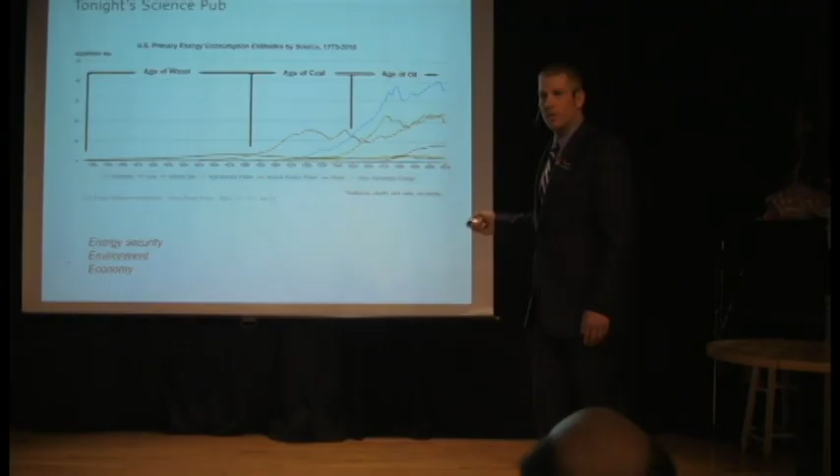Okay, so a little background. I was doing a presentation at the University of Fairbanks, Alaska, and I came across this slide, and I never really thought about it, but we had the age of wood in this country. And given our choice, we chose to go back to the age of wood for energy. And then we had the age of coal here. Coal is this brown right here. Coal is tailing off. And then we had the age of oil here starting about 1950. And we see the downturn in oil. And we actually see an uptick in the green here for natural gas. And then we have our renewables and nuclear over here, rounding out the balance.

When I look at the energy situation in this country, I really think about these kind of 3 E's. It's a good way to think about it. You have to address all of these. That's energy security, the environment, and the economics of it. Frankly, you have to nail all 3 of these if you're going to be successful. So, we'll talk a little bit more about the energy situation here in the United States. Talk a little more about natural gas. So, we have natural gas, you see the pipeline, but there's other types of natural gas, renewable types of natural gas we're going to be able to make better use of. And why are we hearing about natural gas? So we'll talk a little bit about that. And that pops for emphasis.

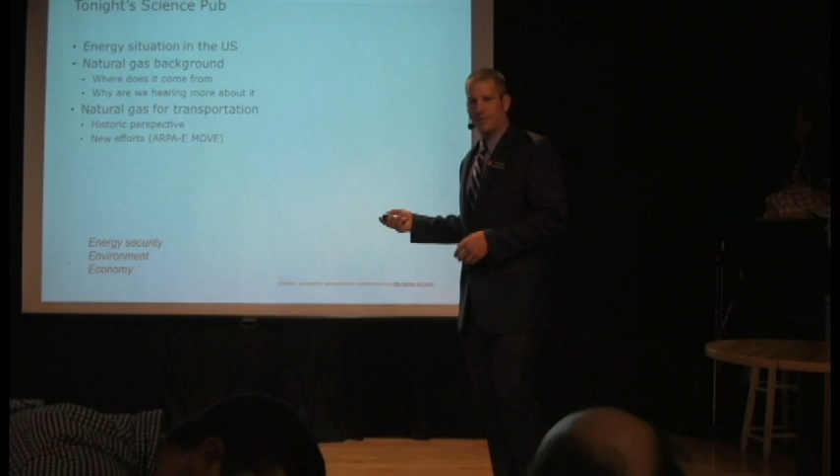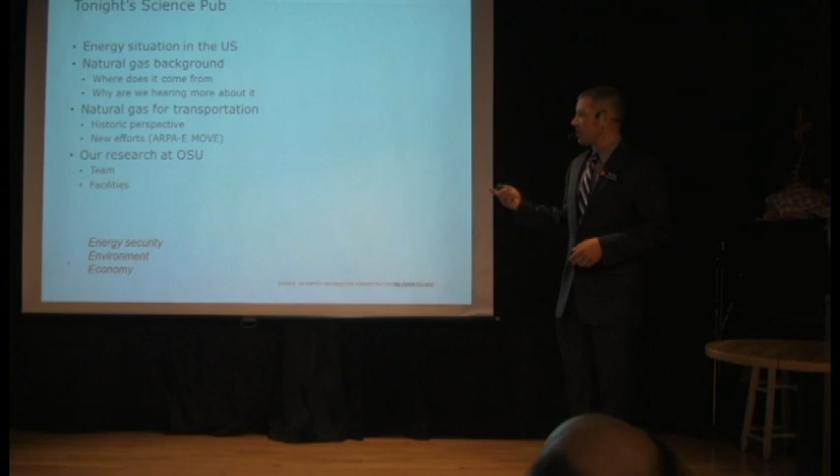So natural gas for transportation, I want to give you a little bit of a historical perspective there. And then new efforts, this is the research that we're doing in Bend. And then talk a little bit about my team and facilities, and then recap.

Okay, so natural gas, you can see here, proven reserves are going exponential, and we'll talk a little more about that. That's thanks to not necessarily so much hydraulic fracturing as it is directional drilling. So hydraulic fracturing is actually on everybody's mind, but what's really enabled this has been directional drilling. Our petroleum reserves in this country have been declining.

Because of this, we have this decoupling of the price of natural gas from petroleum, where just in the last 5 years, basically, petroleum has increased in cost quite a bit per barrel, while natural gas has actually dipped. Natural gas costs about $1 a gallon of gas equivalent, $1 to $2 a gallon gas equivalent if you were able to fill your car with natural gas. So there's an opportunity there.

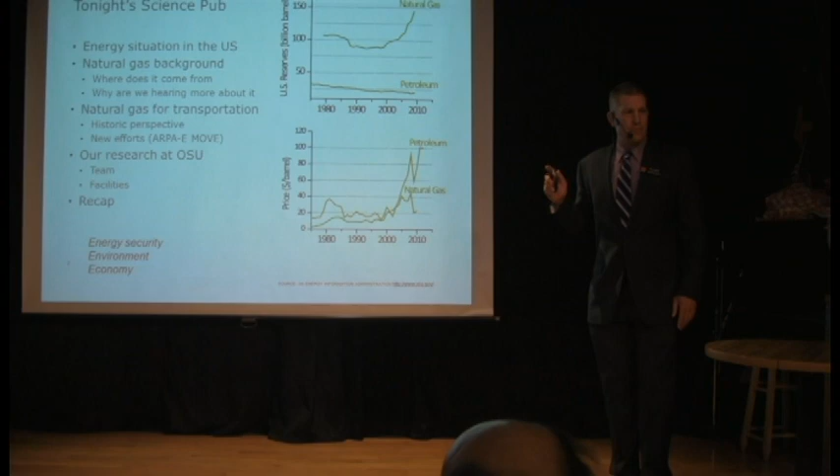And one other thing that really puts this in perspective for me in my career is back here in about 2002, 2003, when there was actually parity with natural gas and petroleum, or natural gas being slightly more expensive. I was out in the fields of Wyoming with the product my company had at the time called the natural gas blower that was sucking depleted wells for their natural gas, even at the price of natural gas being greater than petroleum, because it was financially feasible. So we've gone from sucking natural gas out of depleted wells with natural gas being unfavorable to having plenty of natural gas.

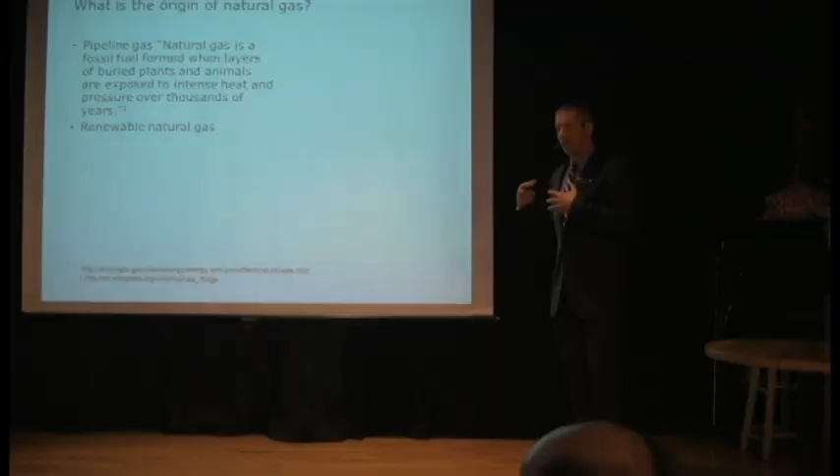Okay, so where do we get the natural gas in this country? What I like to call pipeline natural gas is from fossil origins, layered plants and animals and so on over thousands of years. Renewable natural gas is something that's fun to think about. So as a person who's on the engine side of things or the power generation side of things, I try not to concern myself too much about where the molecules come from, because basically they could be coming from a pipeline, they could be coming from renewable sources. For example, biogas, water treatment plants, landfill, livestock.

And so when I came to Oregon, I thought, okay, what does Oregon have as far as natural gas? It turns out it doesn't produce any, so I had to look to see where I might find some natural gas. The Japanese are exploiting this. So I think there's some research here in Corvallis for methane hydrates, and I'm interested in methane hydrates. But the Japanese don't really have a choice, and they are leading the technology as far as tapping into methane hydrates.

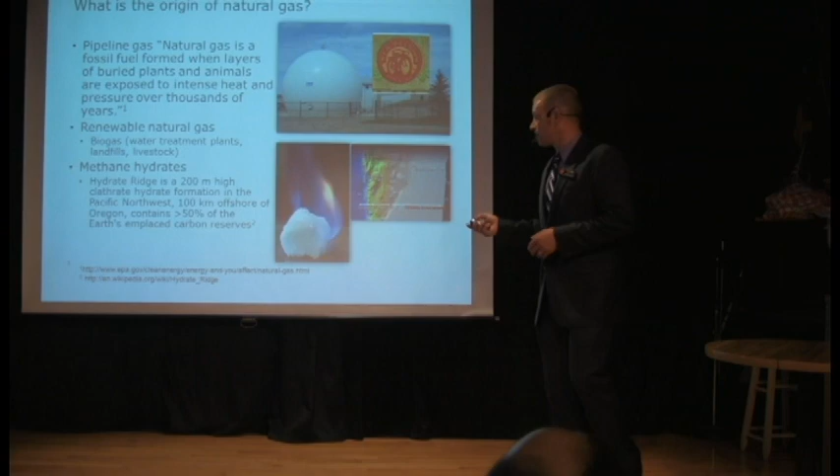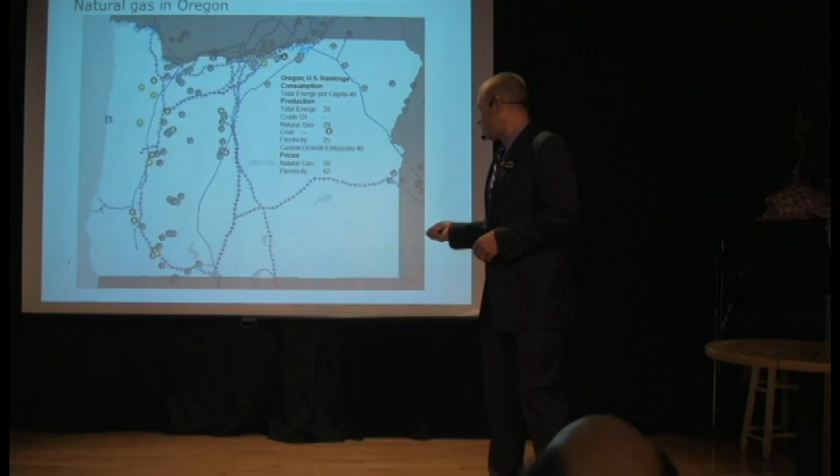What I also like to note on this map is this line right here, which is the Ruby pipeline. A friend of mine helped build that. It's a 42-inch natural gas pipeline. And you can see how it comes down through Nevada, goes around California, hugs the border of Oregon and California until it gets here, so that El Paso, which is now Kinder Morgan, can pass it off to Williams Gas Pipeline. It becomes their head when it goes to California. So there's a lot going on there with the regulatory and financial situation.

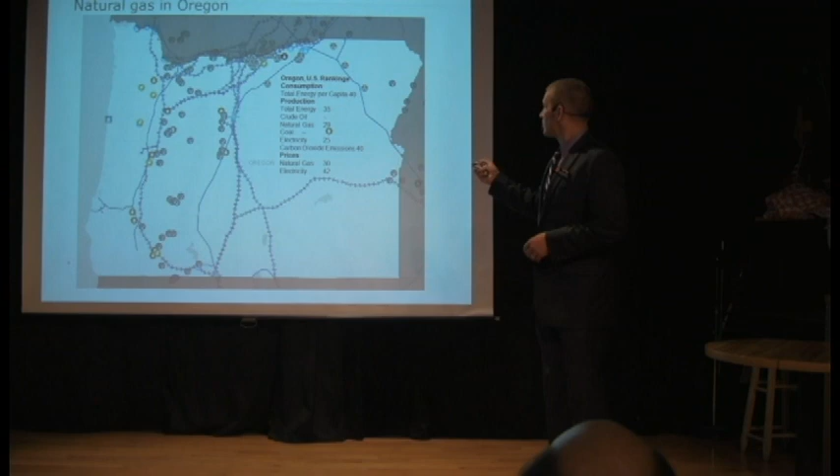So this is Oregon. I want to contrast that. Oh, and by the way, I just toured the Arlington landfill, which is up here by my pointer.

Up here between Biggs Junction and Hermiston, where they do a lot of landfill gas power generation and they do gasification. They get all the trash from Seattle. They take it, they let it decompose, they do power generation with it, and then they sell electricity back to Seattle for their renewable credits. And so it's a pretty ingenious situation and a great tour to get a chance to go on.

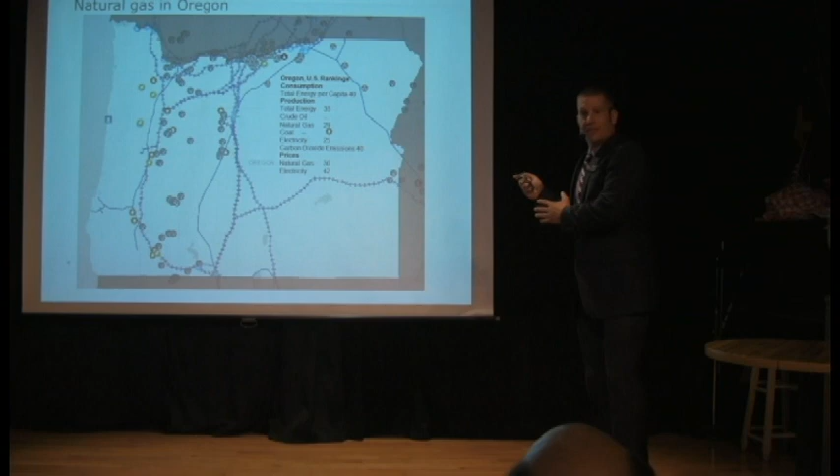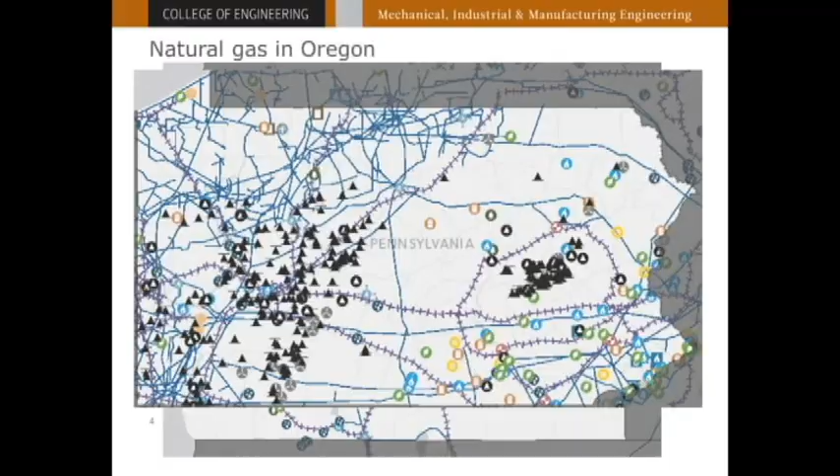We're very fortunate here to have a lot of hydro, but to look at the country, there's a lot going on. And this is some of the Marcellus Shale, which we'll talk a little bit about. But the point here is that other parts of the country have a lot going on as far as exploiting natural resources.

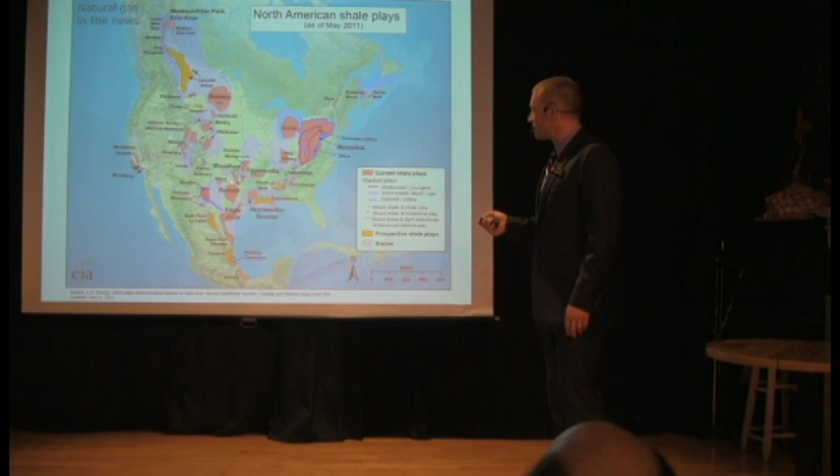So in the past, when I was working on the pipeline, we were trying to get gas from the Gulf of Mexico up here to the population centers of the Northeast. You can see what happens when you find this giant Marcellus shale right there next to the population center. So they were building new pipelines to take the gas from the Gulf or the Rockies to get it over here to the Northeast where prices were favorable.

Well, with the Marcellus shale, it turns out, with the most recent information I have, some of those pipelines are looking at reversing because there's so much gas here in the Marcellus shale that these guys up here in the Northeast no longer need it, and they might try to send it back somewhere in the middle of the country.

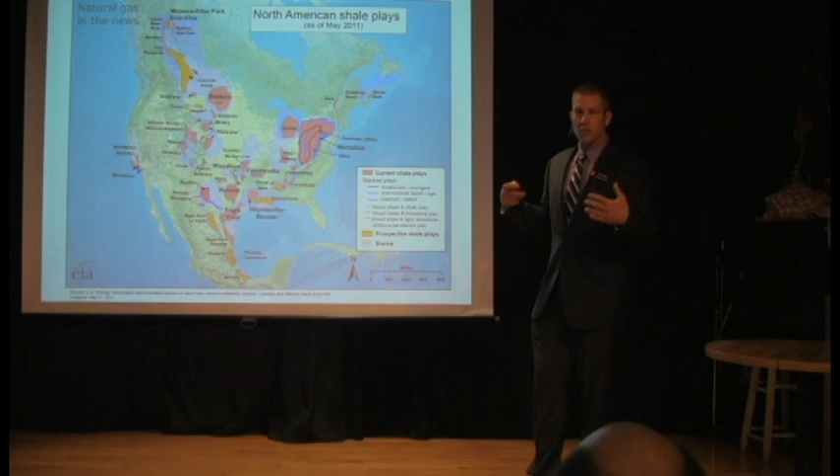So the Barnett, Eagle Ford, and some of the Colorado, Wyoming shale plays have really been exploited because they already had the ability there, they were already drilling there. So these guys went first. And then the Marcellus shale is strategically positioned.

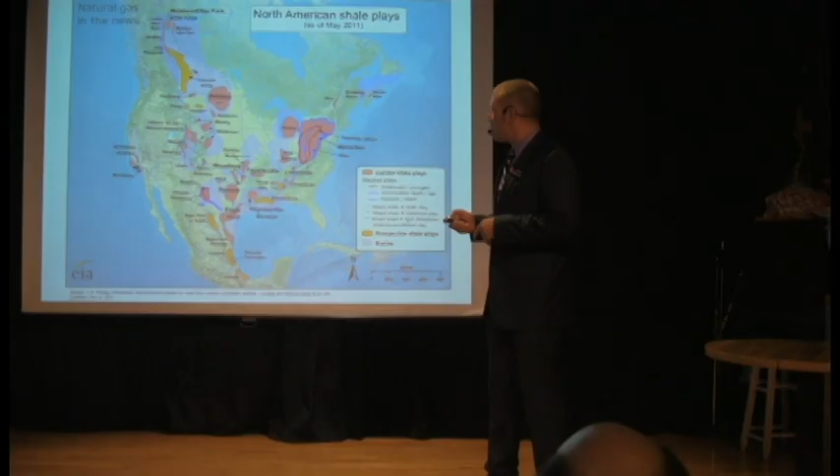Some of the news stories you're hearing is the Bakken up here in North Dakota. It really is the Wild West. I just recently saw a talk where people at McDonald's make $20+ an hour because that's the only way they can get people to work at McDonald's. I have a little bit of a Clint Eastwood good, bad, and ugly theme in some of my other slides. So, to tie that in, this is the Wild West right here. So that's an interesting one to follow.

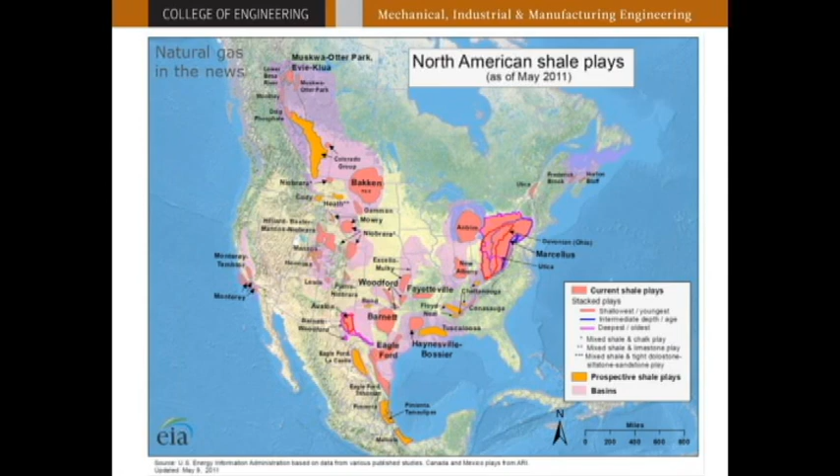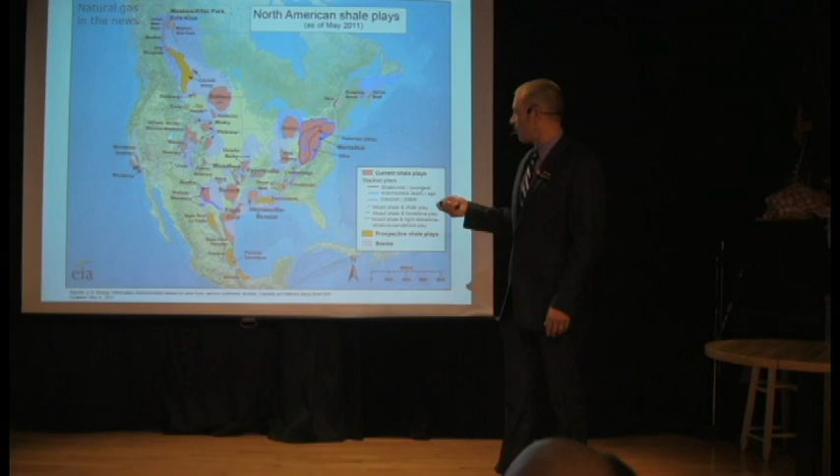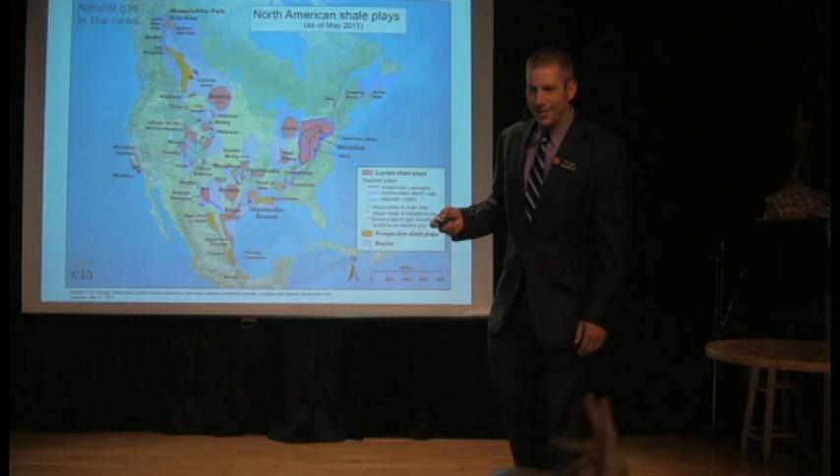So that's why you hear a lot about natural gas, that and the method for getting it, the hydraulic fracturing and directional drilling. Chris, what's the difference between a play and a basin? I don't know, I'm not an exploration person. Yeah, that's a jargon I use.

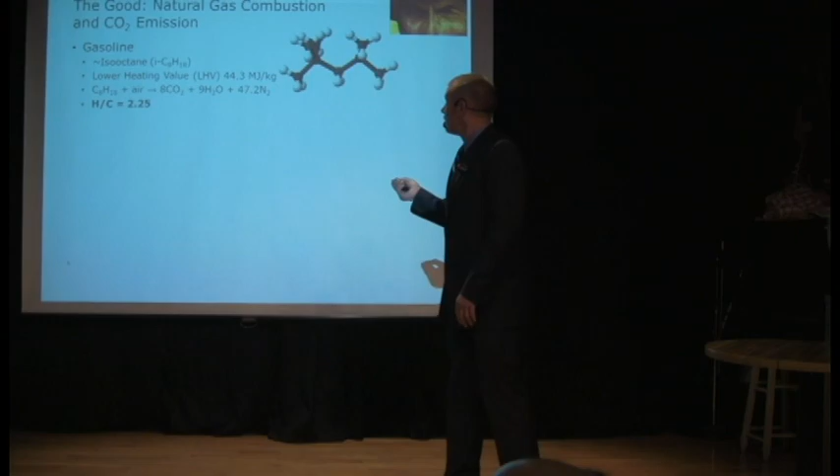Okay, so the good, bad, and the ugly for this natural gas situation. So what I consider to be the good is if you have gasoline, which mechanical engineers model as 2,2,4-trimethylpentane, which is the closest single molecule we can get to behave like gasoline. You have a low heating value of 44.3 megajoules per kilogram. This is the stoichiometric equation, but what I want you to look at is you have 9 waters to every 8 CO2 molecules per molecule of fuel. And the hydrogen to carbon ratio is 2.25.

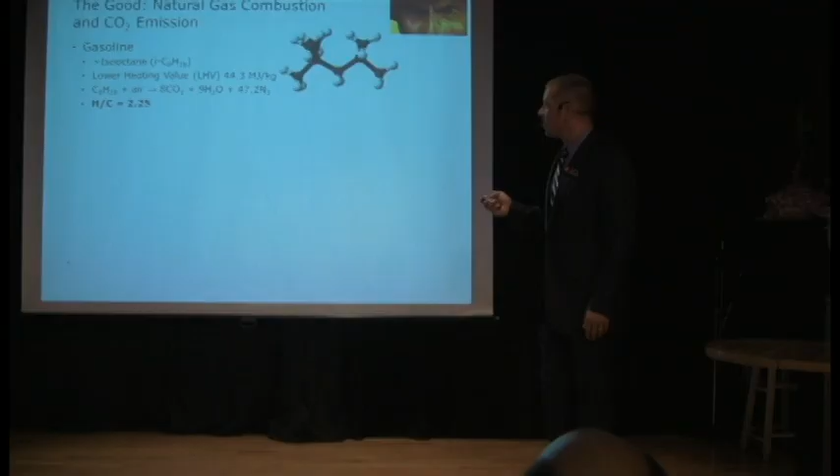Okay, so natural gas, which is modeled as methane generally, because it's mostly methane, 85 to 95% methane, has 50 megajoules per kilogram. So that heating value on a mass basis, which some of you got right in the trivia, is higher for methane than it is for natural gas. It's higher for natural gas than it is for gasoline.

But the stoichiometric equation here has 2 waters for every 1 CO2, and it has a hydrogen to carbon ratio of 4. So basically you have a fuel here that has more energy per unit mass, that produces less CO2, significantly less CO2. So one would think, okay, well this is great. If you have to make a transition from a purely liquid hydrocarbon basis, and you're stepping towards a lower greenhouse gas situation, natural gas is not a bad intermediate step.

So this became apparent to me when I saw Robert Kennedy Jr. talking at the Colorado Oil and Gas Show back in 2010. So he's an environmental lawyer. He came to talk to the other side, which was the oil and gas people, to say, hey, listen, we're doing all these renewable fuels installations, but the wind doesn't always blow and the sun doesn't always shine. But we want to have base load type technology.

And so they're going to use natural gas. Natural gas is a natural fit to smooth out the transients for the wind farms and the solar installations. So to me, this showed that there was a good way for everybody to work together with natural gas.

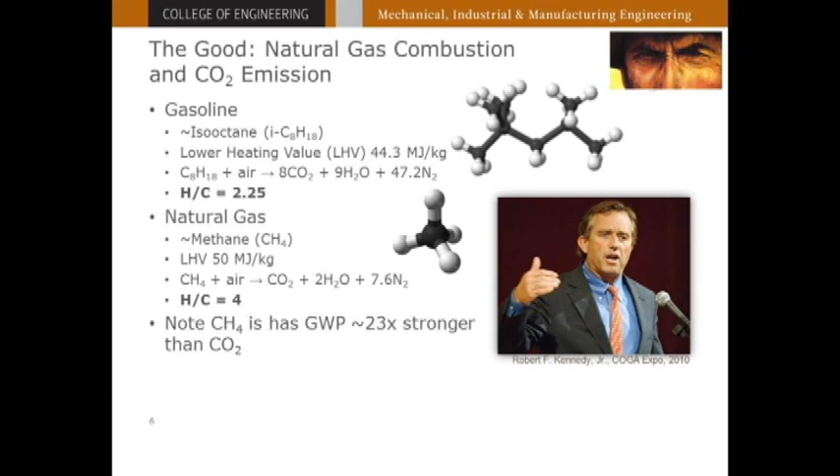One of the downsides is that methane has a global warming potential of 23 times or higher than CO2. And that's all dependent upon the lifetime of the molecules, over what time you're going to look at, and the spectral absorption for the different molecules. But anyhow, if you let that methane leak out, it's actually not helping us as much as we would hope.

Okay, the bad. Hydraulic fracturing and horizontal drilling. So this is the drilling situation for natural gas. Before we did conventional drilling, which was we drilled down a little bit, it was right there, a big pocket, we got a bunch of it, it was easy, and everybody was happy. So now we're going down much, much deeper, and we're doing the directional drilling. So we're getting down here in these tight sands and gas shales, and we're fracturing these formations.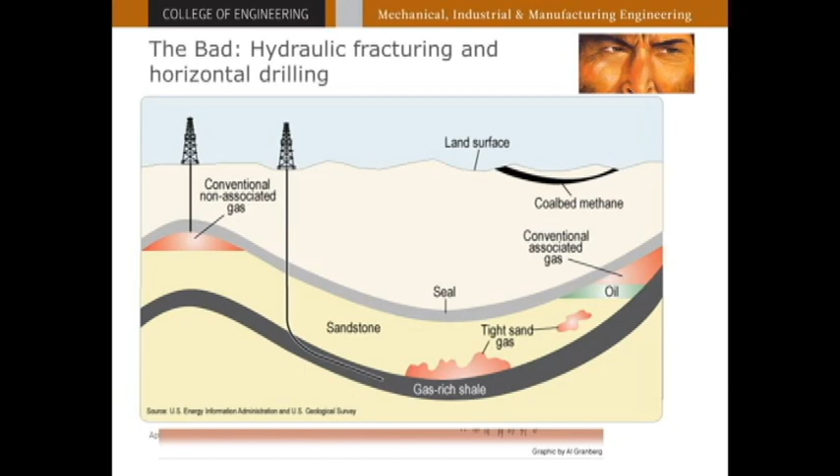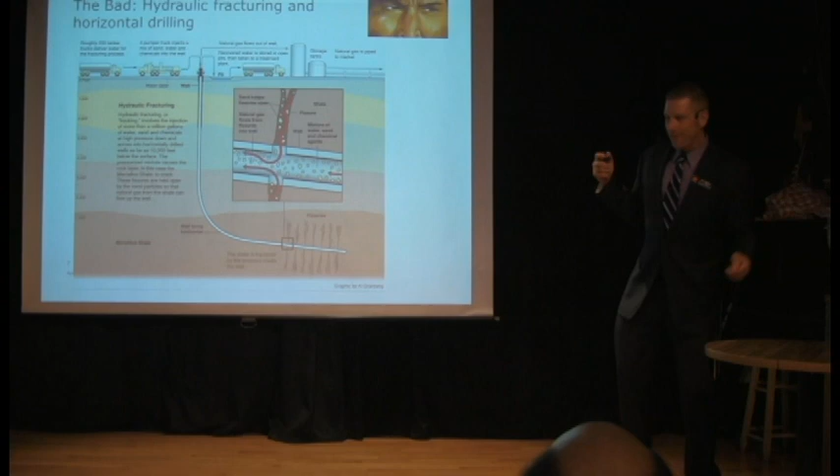I'm not a geologist, so I apologize if there are geologists here. But we get in here, we fracture this, and then the natural gas seeps out. Here's some of the gory details. So I've been out in the field, I've seen this, but I also recognize enough that I'm far from expert on this subject. They're big operations, but I thought it would make sense to just walk you through it a little bit as far as I understand it.

You have roughly 200 tankers of water coming in for the fracturing process. You pump it down there with a pump truck. You have millions of gallons going down there, and basically with hydraulic pressure in a perforated well bore, you hydraulically crack the rock around it. And your water has the sand in it and some chemicals. The chemicals are for antifungal, they're for viscosity and so on. It's a cocktail of chemicals in there, in the parts per million, as I understand it.

You fracture the rock, you prop it open with the sand grains, and then the gas comes back out, and it has produced water. A lot of the controversy has to do with this cocktail of chemicals, and I don't really closely follow the legal situation, but drilling companies want to keep that as intellectual property. So if I can come to you and say, well, I have the right mixture to put down this hole, and I can produce a lot more out of your well, you're going to want to come to me. And so that's why people have held those chemical mixtures very tight.

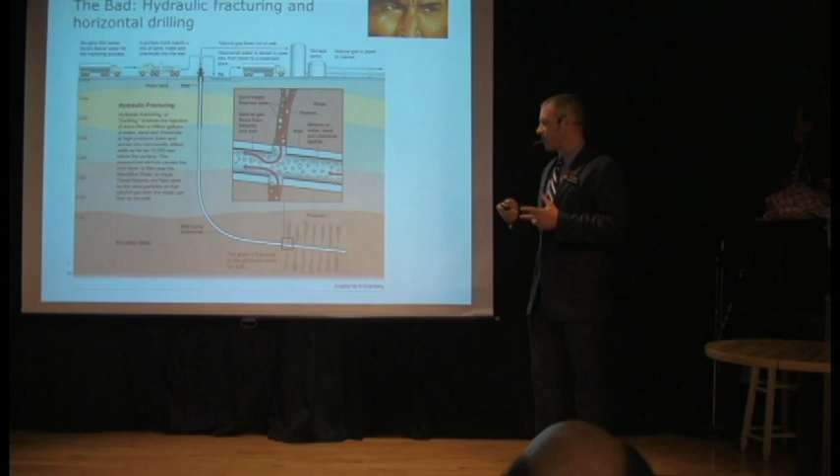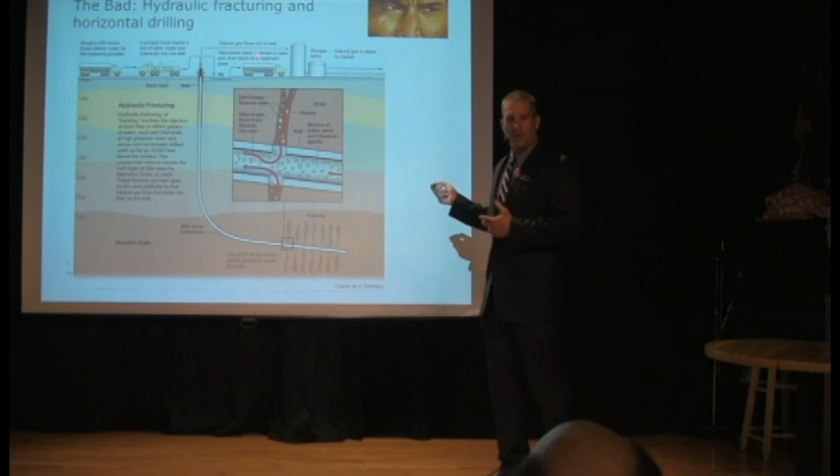I think some states, like Colorado, require you to disclose what's in your fracking fluid. Anyhow, the natural gas comes out, but then you get this produced water. And this is one thing that I think is kind of convenient, that it just gets trucked off and goes somewhere, or stored. There's millions of gallons of water that just gets treated, and I'm still trying to fill in the gap there on the treatment. I've seen these ponds, but I just want to hear the rest of the story on the water, because we all know water in so many ways is integral to energy going forward, and it's really important in these fracturing processes.

Okay, so one more thing about fracking and horizontal drilling. What it's allowed us to do, so fracking's been around for decades. Some people say the 1940s. And so there's nothing new about it. We're just exploiting it, and we're getting a lot more gas from it.

The horizontal drilling, they can come down now and go out 5 miles horizontal in one direction. And so one of the universities in Texas, a branch campus, has drilled 22 wells from one pad using horizontal drilling on campus and accessed 1,100 acres for natural gas. And if you've ever been to these oil and gas operations, there's roads everywhere, there's pads everywhere, and the ability to sit on one pad and drill all around you drastically reduces the environmental impact.

So what's the ugly? Okay, so this is about 5 miles from where I lived in Fort Collins. So I can sit here in Bend, Oregon and say, well, that's Texas's problem or that's Oklahoma's problem, it'll never happen anywhere near me. Well, here's a well gone wrong right on I-25 in northern Colorado. Like I said, 5 miles from my old home. And so this is just an example of things do go wrong.

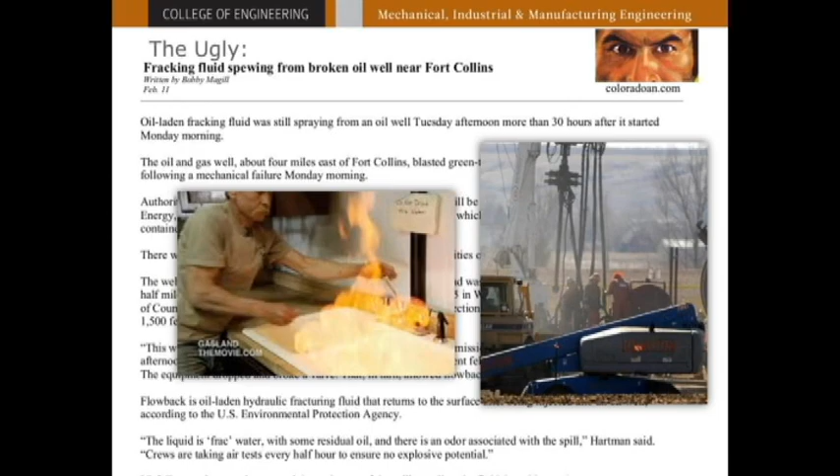And then there's the documentaries, Gasland. I haven't watched this one. I haven't watched the rebuttal documentary to it either. I'm actually too busy out doing research. But the premise there is that hydraulic fracturing is causing people's water to light on fire and contaminating groundwater. It's a really hard situation to follow. And I feel like as you get bigger companies involved, more skin in the game, and the EPA gets involved, and we get better methods, we're going to be a little more comfortable with that.

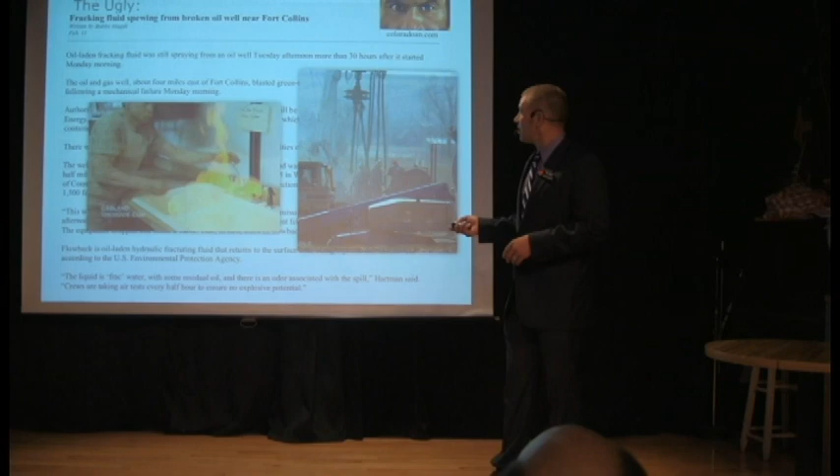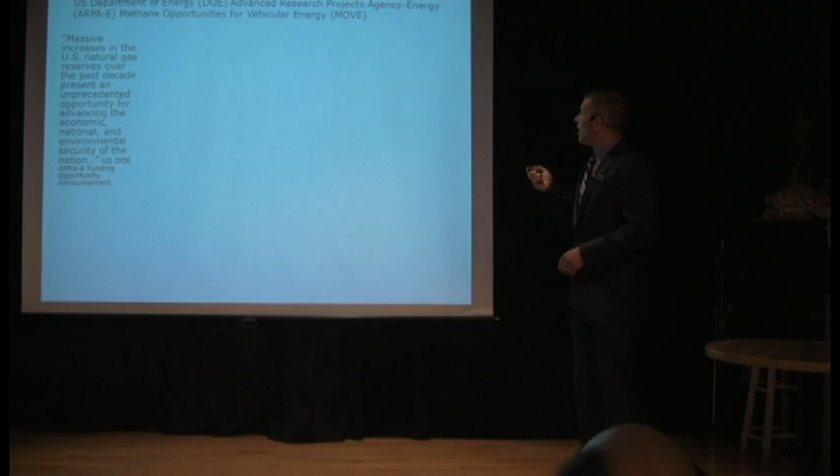Okay, so that's the background. On to what we're doing here at Oregon State. The Department of Energy recognized this opportunity. There's a branch of the Department of Energy called the Advanced Research Projects Agency for Energy, ARPA-E, and it's patterned after DARPA. They more closely manage smaller projects, and they have a big commercialization component. But they saw this massive increase in natural gas and said, we have this unprecedented opportunity for economic gain in this country, if we can exploit that, again, for security and environmental benefit.

The state-of-the-art prior to this program was what's called the FuelMaker Phill. So you could buy this little compressor, put it in your garage, and fill your car at home with natural gas. We didn't have the favorable price differences when the Phill was being produced. And on top of the premium you paid for a natural gas vehicle, now you're paying an extra $5,000 to $8,000 to install this compressor at home, and then it takes 8 hours to fill your car. And on top of that, there were some reliability issues with the Phill, as I understand it.

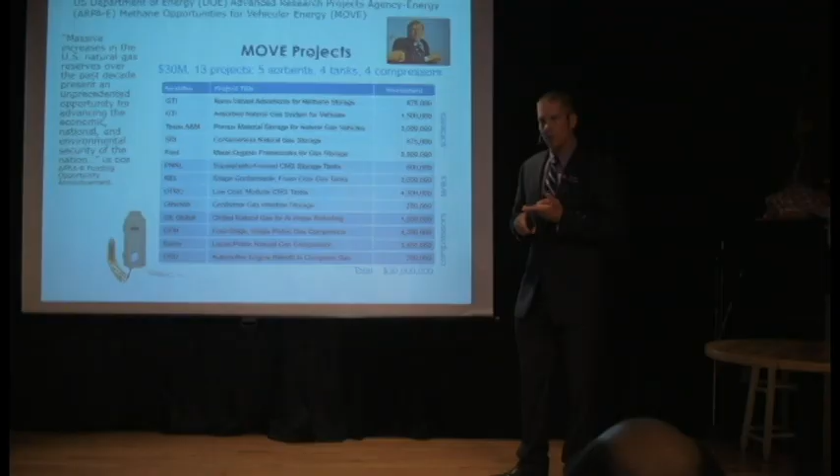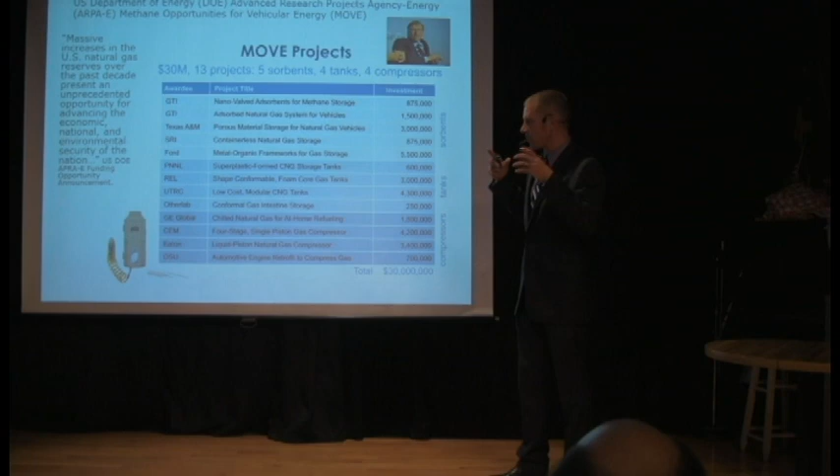So, ARPA-E created this program called MOVE, Methane Opportunities for Vehicular Energy, where they funded 13 projects, and they wanted to attack home compression. We all have cheap natural gas at home, so if we can do home compression, we remove the whole infrastructure issue with natural gas. We want to have better tanks. If we can do conformable tanks, they can be in any shape, so your car has more flexibility, you don't have to have cylindrical tanks. And then adsorbents, so we can have higher density storage on our vehicle without having to go to high pressure, because the pressure is a big challenge.

So those are the three areas where the Department of Energy funded research. And you can see they're pretty big players. We have Gas Technology Institute, Ford, UTRC, GE. So we're down here in the home compression section, where we had a $700,000 award for this research to retrofit an engine to do its own compression, and I'll explain more of that later. But we're competing with the likes of Eaton, GE Global.

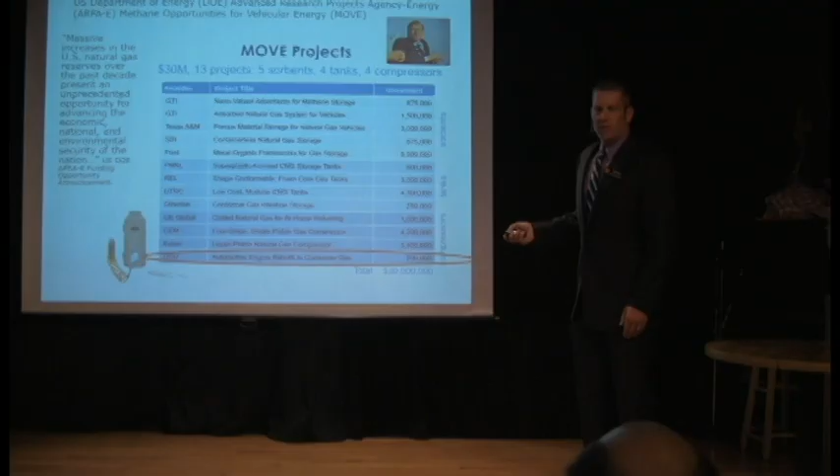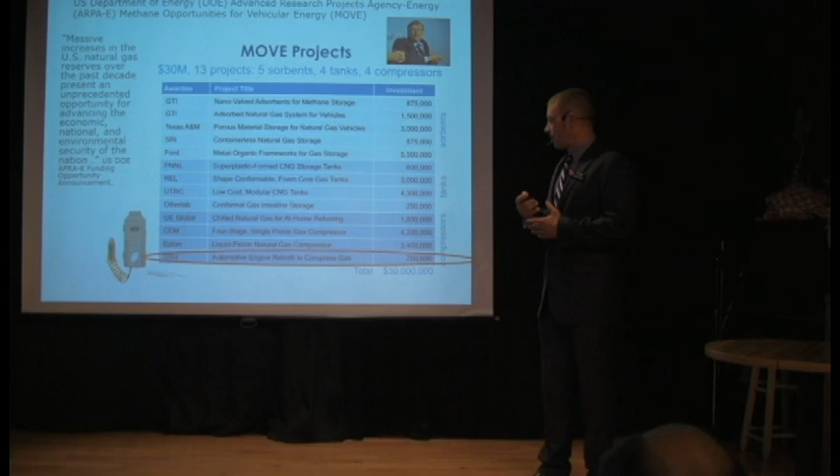Because of our performance in the first year, ARPA-E awarded me another $300,000. And then, because of our performance in the second year, they are in negotiations with my company. They actually are flying up to Bend tomorrow to meet with us to do a much bigger support of our program. So we're going to get bumped up again a significant amount because they're so happy with the progress my students and my research group have made. So down here we're playing with some of the big boys and working on natural gas compression at home.

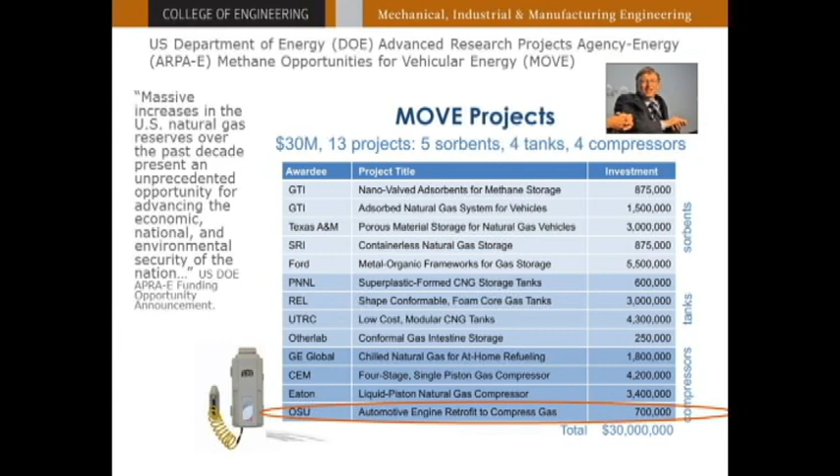And ARPA-E, this is the picture of Bill Gates. They have an energy summit every year, and he was there the year before I started, and then we had Elon Musk and T. Boone Pickens. It's a pretty big deal. We go there. This year we had a very big presence there in Washington, D.C. to show all the work we've been doing in Bend.

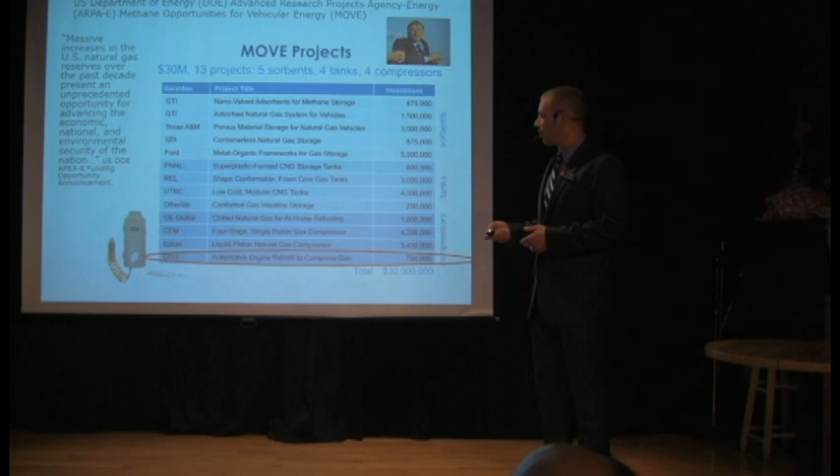Okay, so before we get to my project, we'll give a little more background. Natural gas transportation. So it's got quite a long history, right? So this is your natural gas tank. So we have low pressure, people are trying to make it work, right? But now the tank technology actually is very important.

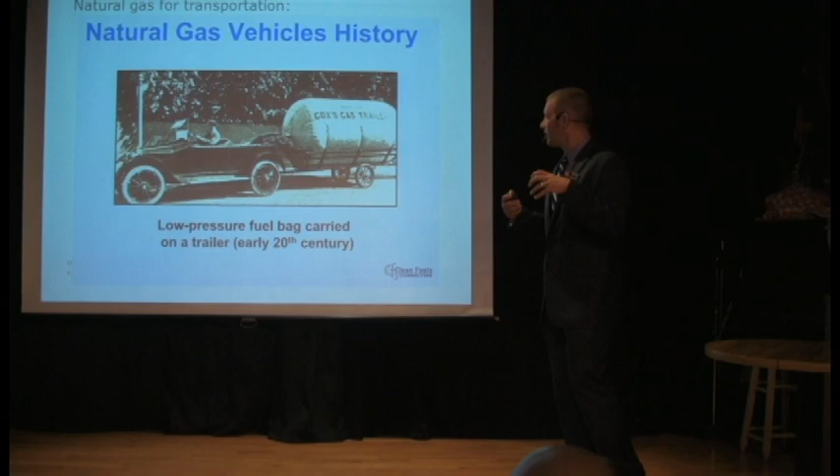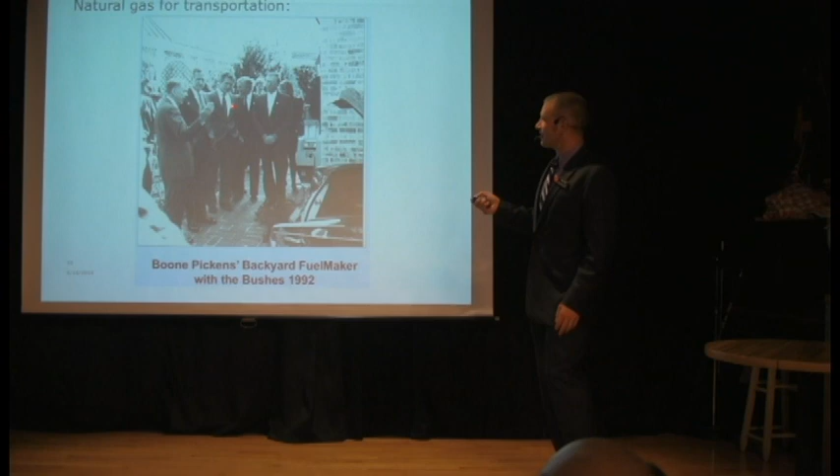Is that Tony Bennett? I don't know, I was trying to figure that out.

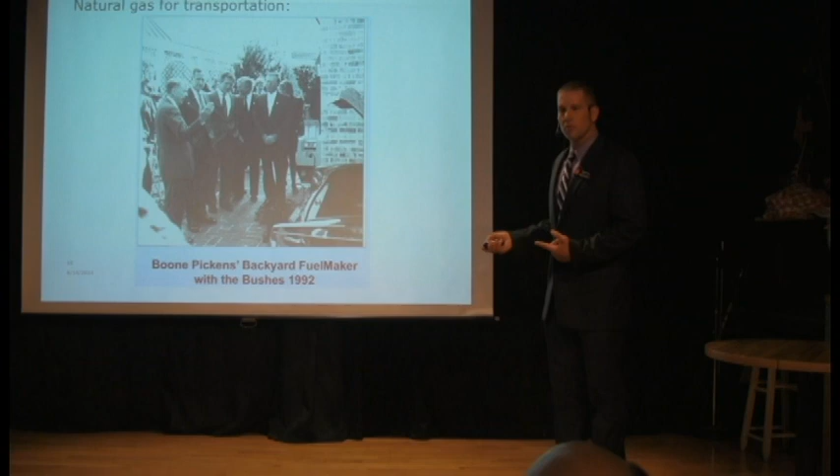And we have back here is the FuelMaker home compressor. So the earlier version of what I was showing you, and T. Boone is obviously trying to convince everybody here that they should be home refueling. This is back in 1992. So T. Boone's been at it for a while.

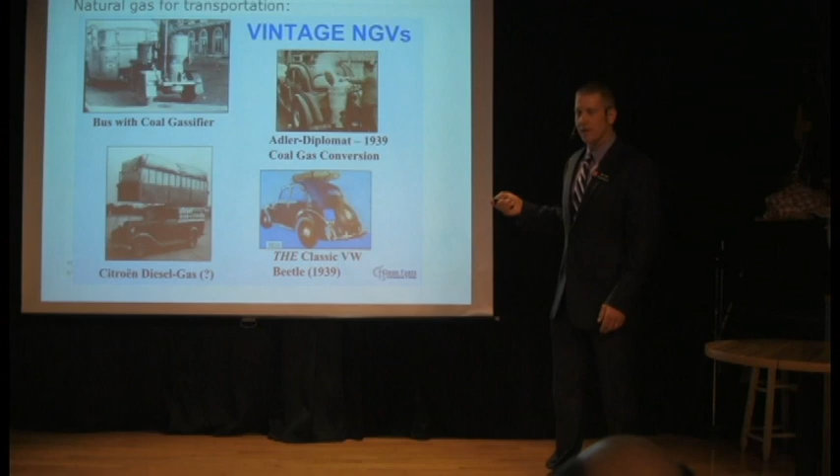Other historical natural gas vehicles. Well, this right here is a syngas vehicle with a coal gasifier. So the chemists and chemical engineers in the room will know that Fischer-Tropsch has been around since World War II, where you can gasify the coal and make syngas. And what I think is fun about some of these tow-behind gasification systems is that syngas is CO and hydrogen. So if the hydrogen isn't blowing you up, the CO is going to. So it really wasn't that desirable.

We have another gasification, actually this one's in the car. But then we have our low pressure storage here with the big vehicle with the big gas bag on top. 1939 we get a little more sophisticated. We're now using gas cylinders here, and the technology has continued to get better and better. It's just a fun historical perspective, right? This is not new. Very few of these things are actually novel, but people have been trying to do it for a while.

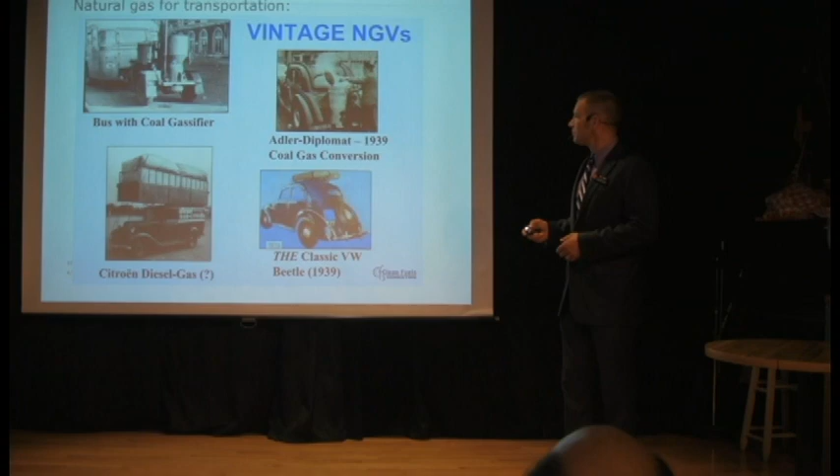So prior to this program, Honda had the Civic full-time natural gas vehicle. So we have vehicles that have the technology to run on natural gas. It's actually not that difficult to convert a vehicle from spark-ignited gasoline to natural gas or diesel. So the technology exists, and there's more and more vehicles coming out that run on natural gas or biofuel.

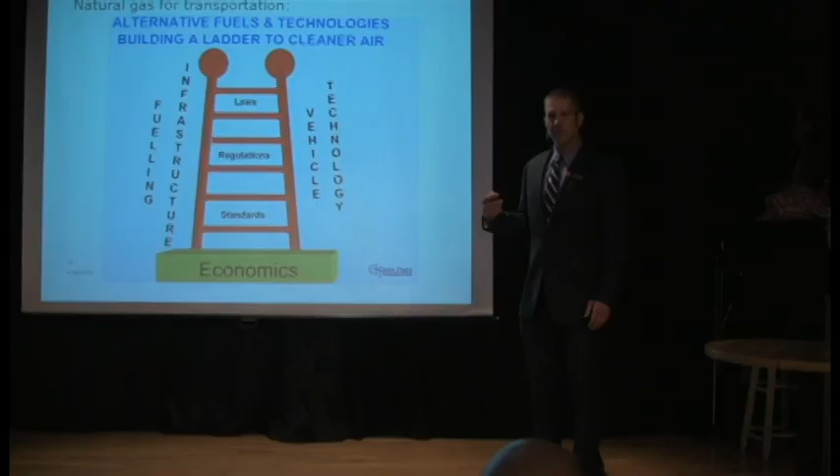Infrastructure. This is the issue we're trying to attack. There are 600 natural gas fueling stations in the United States versus 150,000 gasoline stations. Okay, and there's something like tens of millions of homes with natural gas, and natural gas is cheap. So right now, the infrastructure is the issue. How are you going to get that fuel into the vehicle? And once we get those squared away, then it is the standards, the regulations, and the law that make it all happen. And that takes a while. We've never been involved in any of that.

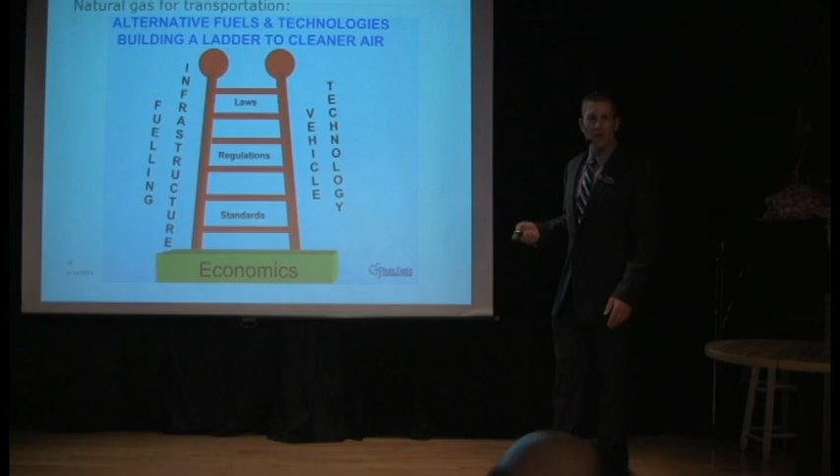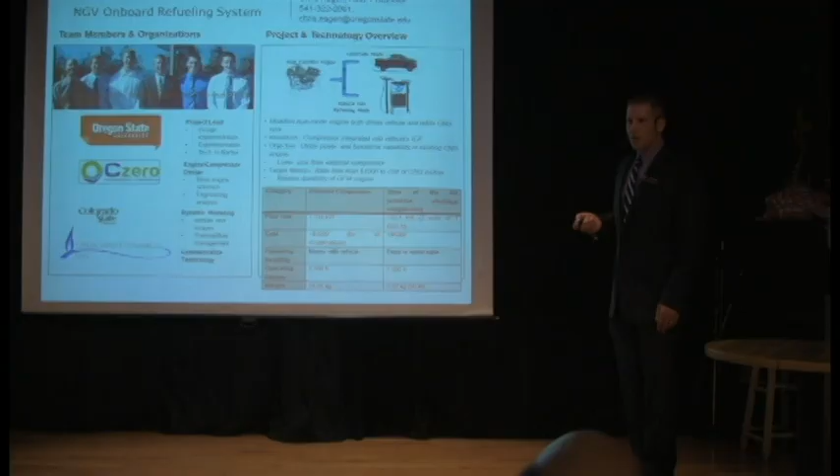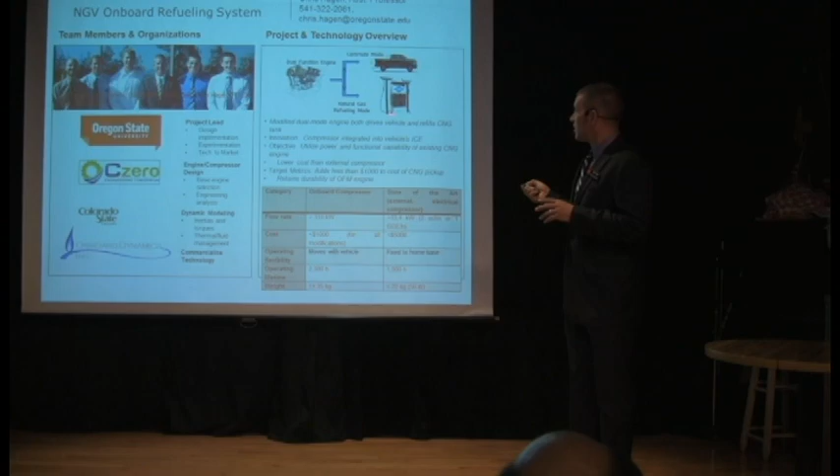In a nutshell, we are taking an internal combustion engine and making it into a dual function engine. One of the cylinders of the engine has two sets of valves. One set of valves are the normal intake and exhaust valves, and we can deactivate those valves and turn them off. We have another set of valves we can turn on in that cylinder. And that cylinder can behave either as a natural gas compressor, or when we switch it back on to combustion, that cylinder switches to combustion. So we're driving the compressor, we're making the engine the compressor, and it behaves as a normal engine. And I'll show some more detailed pictures.

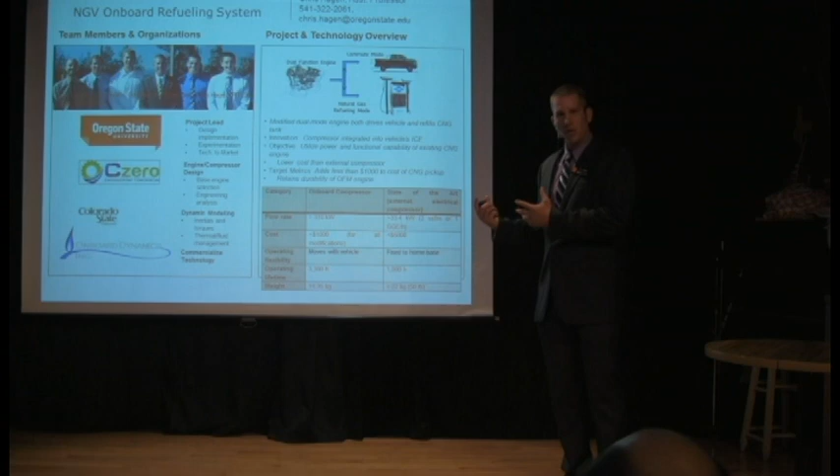But the whole idea was to say, okay, well, why don't we take advantage of what's under the hood, which actually already looks like a compressor, and use it for compressing natural gas. So we have this dual mode engine, and since it's much bigger than that home compressor I showed you, we actually have an opportunity to flow quite a bit of gas, an order of magnitude more than that little compressor we were showing you, and then we claim we can do it a lot cheaper.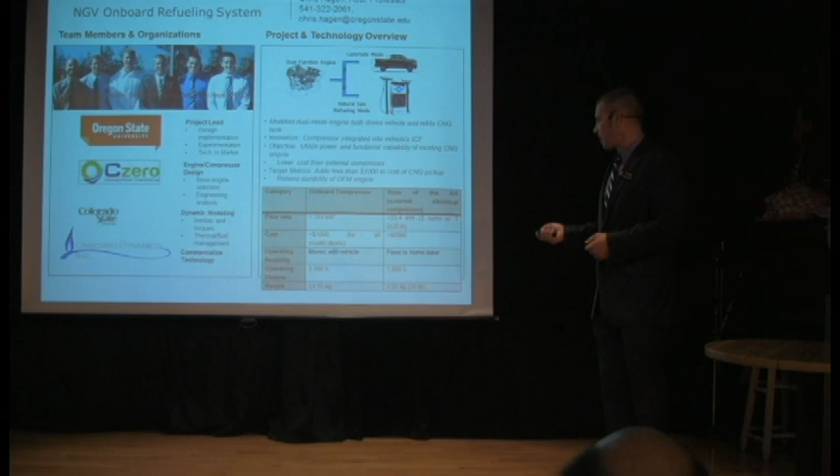Another fun feature of this dual mode engine compressor is that the compressor travels with you. So if you have that tap at your house, and I have that tap at my house, I can go to your house and fill my vehicle. And you can go to my house and fill the vehicle, because your compressor is with you. So that's another big benefit. And we say it's going to last forever and weigh nothing.

So, a little bit more close-up of this dual mode concept. This is a very early stage schematic, very early stage. But basically, I want to turn these two valves off. I want to figure out a way to get gas in there, and I'm going to do it in multiple stages. So I have to go through the engine multiple times. So I have staging tanks. I do some rejection of heat, compression, and so on. And eventually, I fill my tank. For those of you who are interested in engines, our base engine is a 5.9 liter Cummins diesel engine.

So if you're interested in pressure, natural gas is stored at 250 atmospheres. That's what the standard is for the United States. That's 3,600 psi. And so if you know much about engines, your gasoline engine that you drove here with is probably good to about 50 atmospheres. And we're trying to get to 250 atmospheres. So if we try to do this with your vehicle, we can blow it up just by pressure.

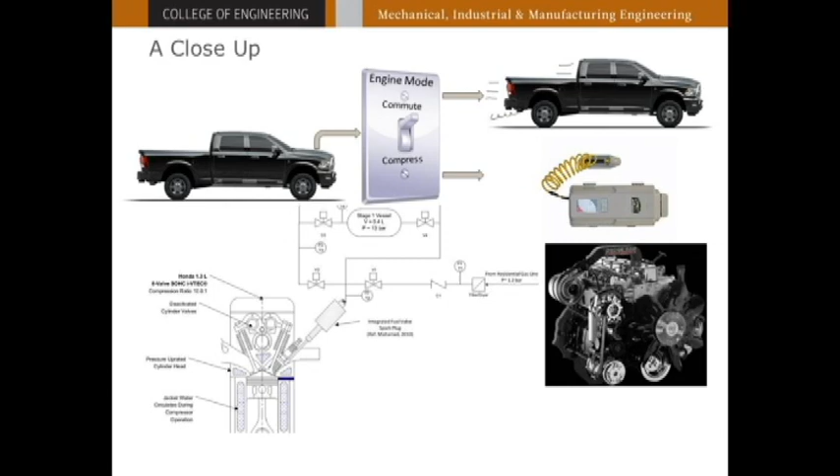So this Cummins 5.9 liter diesel engine is actually the most bomb-proof, hot-rodded engine that we could find out there and get our hands on. And so this was strategic in that we could find aftermarket components, pressure uprate this engine to get to these natural gas compression pressures without having a catastrophic failure.

Okay, so here's what we're doing. This is the test cell, and then I have a little clearer picture later on where there's my group running this engine that I've been describing to you. We have all the necessary controls and blinking and flashing lights. We've taken this natural gas engine, on top of putting new valves in it, we have changed it from a diesel compression ignition engine with a compression ratio of 17 to 1 and 12 valves to a spark-ignited natural gas engine, lower compression ratio. We've added 2 extra valves.

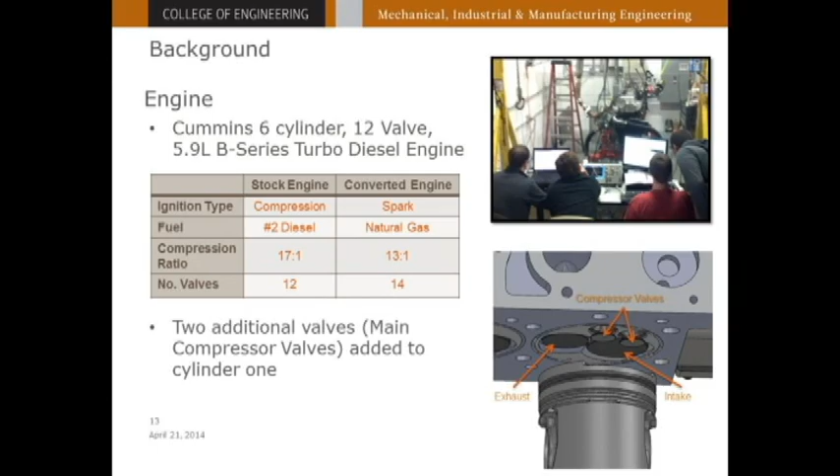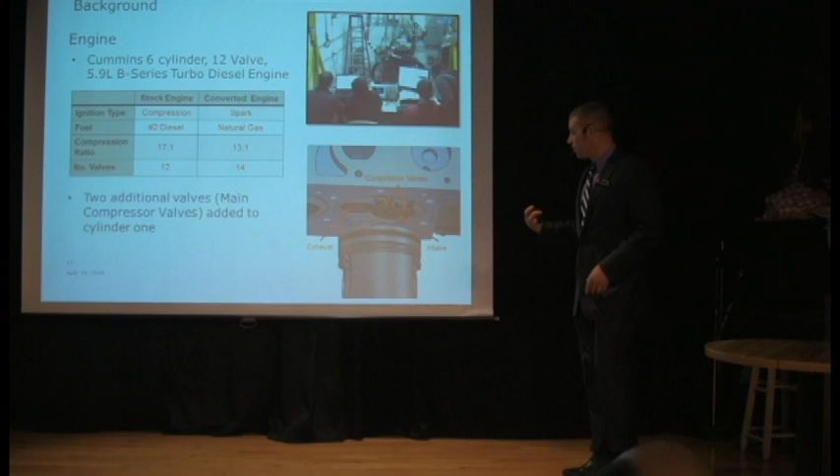So these 2 additional valves are shown right here in this cartoon. So you have your intake and exhaust valves. We're looking at the bottom of the cylinder head. This is a piston. We're looking up from the bottom. We have a custom cylinder deactivation. We can turn these 2 valves off and open these 2 valves and start pumping natural gas. And then when I'm in commute mode, that same cylinder, these compressor valves close and reactivate these, and this cylinder combusts as normal.

So a much better rendering. And I realize that we look at this enough that I just want to make sure that you understand what you're looking at here. This is the top of the engine with the new, more angry beaver here. And we milled into the top, fancy Oregon State stuff in my lab name there.

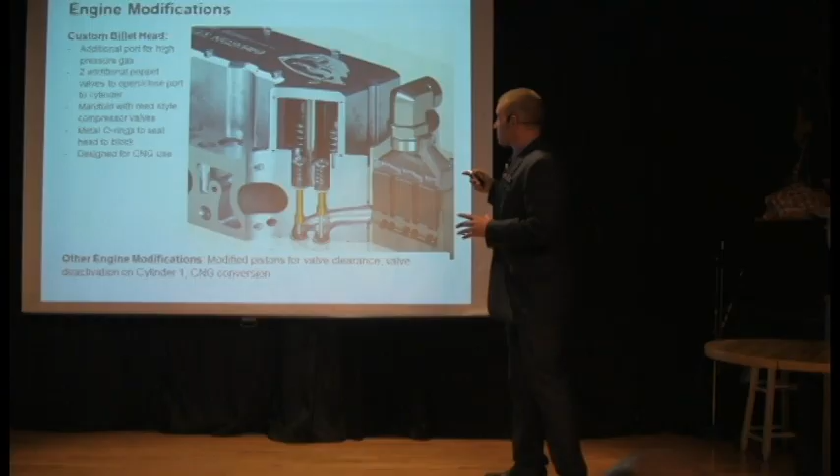So this is another perspective looking at the top, and this is the cylinder head of the engine. We have the intake and exhaust valve in here. These are the 2 compressor valves that we can open up. And once those are open, they access these custom check valves here. We pump gas in and out through that cylinder, through this path here with that engine.

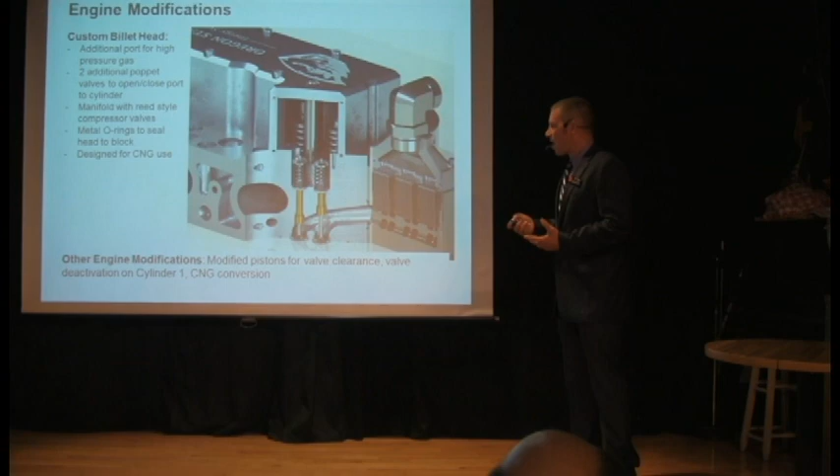Breakthroughs were, like I said, we found an engine that we could get the full CAD solid model of this head, which is a big deal. If you ever tried to deal with automotive companies, this is a special sauce. They won't share it with you. So we had to go out and buy it, and it worked out really well.

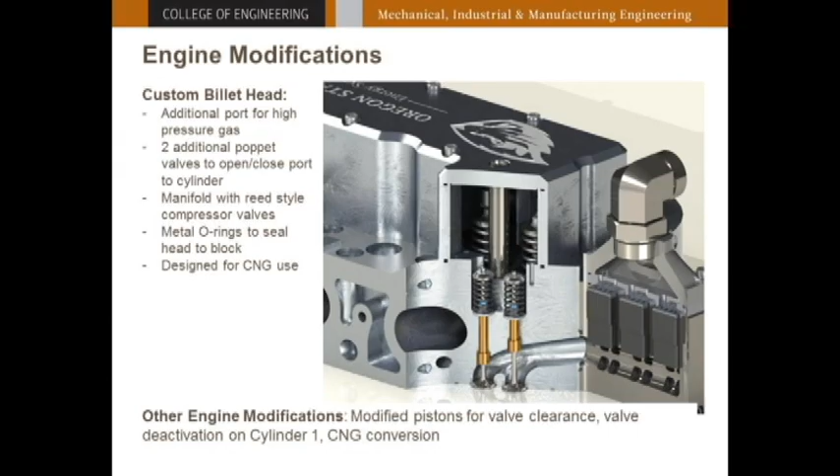So we have the 2 new compressor valves. We put in what's called a fire ring, which is a really heavy-duty head gasket that actually cuts into the head, so we don't blow the head off. Other hot rodding type things, I'm actually not really a hot rodder. But so we've done this kind of full rebuild of the engine.

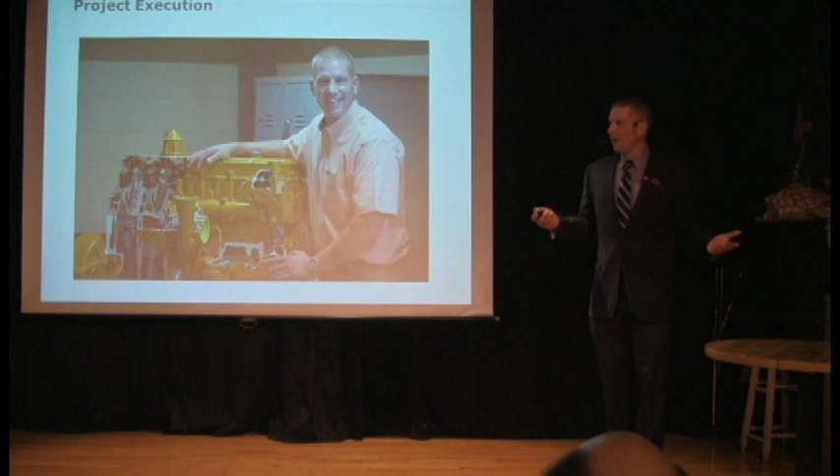So what's amazing is I've done this all on my own, and I take full credit. So in reality, this is our first ESE graduate painting the test cell.

And this is just another small part of the group. These guys have worked really hard. Robert got his BS in mechanical engineering here in Corvallis. I rotate my graduate students between Bend and Corvallis. They basically do their graduate classes here, grade all my classes here, and then they come to Bend. And they aren't skiing like you might think, right? They actually do quite a bit of work.

And Zach is going to be my next new graduate student. Josh is moving on, and a lot of the people aren't pictured here. So this is our engine. I'm touching the check valves. The picture we saw before was a cutaway about this section here. And if you've ever tried to build a facility like this, we've built this in a year and a half with students. And that's just simply incredible to me.

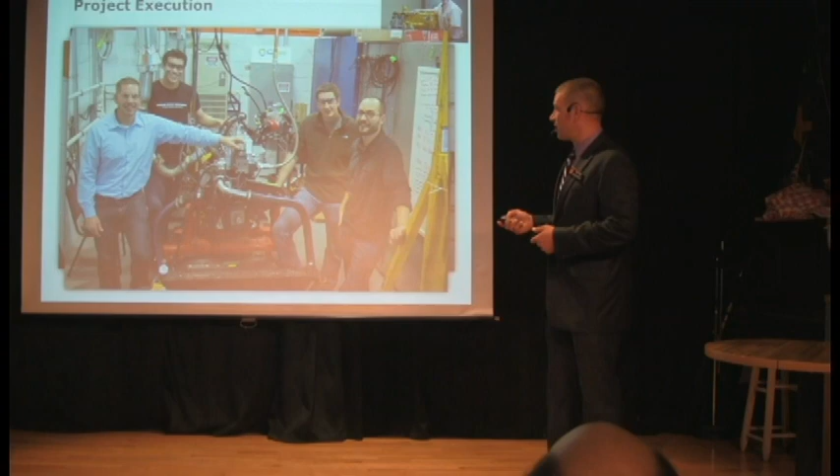We have a lot of safety sensitive type devices here. We have a 125 horsepower electric motor with a variable frequency drive that we're using to drive this engine. So most of the time we're just doing compression experiments, so we don't need to do combustion. We're just using an electric motor to drive the engine and do the experiments. But we have done combustion and so on. So these guys have worked really hard, and they're the reason we're having all this good luck with the awards.

We're also co-located with the Central Oregon Community College automotive program. So you can imagine we have 6 auto bays, all these type of guys, and all the tools and all their knowledge to help us with the conversion side of the operations. Central Oregon Community College has actually been a great partner.

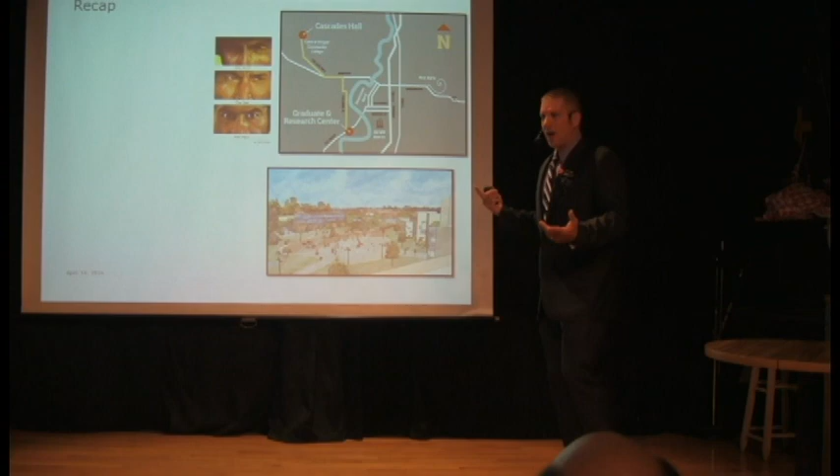Okay, so the good, the bad, and the ugly, right? The good is there are some opportunities with natural gas, greenhouse gas angles. The bad is the hydraulic fracturing and the uglies. Well, we do have a surplus of natural gas here in the United States. Really, it's due to these advanced drilling techniques, not so much hydraulic fracturing as the horizontal drilling. We'd like to see more use for transportation. Like I said, we're actually losing more natural gas than we're using for transportation.

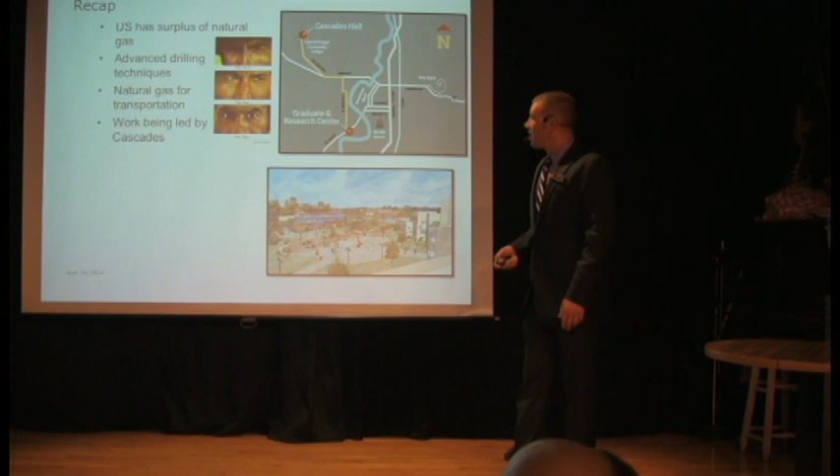We're doing quite a bit of work there at OSU-Cascades in Bend. The work has been supported by ARPA-E and the OSU Venture Development Fund, which is the Office of Commercialization and Corporate Development. OSU-Cascades has provided matching funds.

So I'd like to finish here with this picture of Bend, this cartoon. And if you follow anything about Bend, we're trying to pick a place for a campus, which I think is somewhere right over here. Right now, we're kind of split. We have this artist rendering of what we're going to look like and who we're going to be.